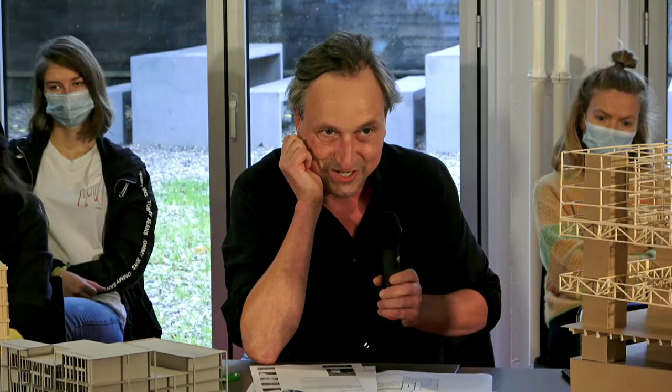Last but not least, I would like to mention that Grafton won in 2020 the Pritzker Prize for architecture. So, I think now we can start with our first speaker.

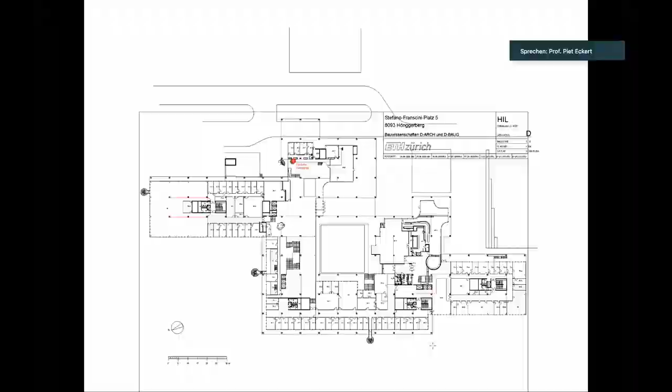And later in Columbia, I experienced the absolute opposite. The idea of the campus of Columbia University was part of the city, basically a city block. It had the intensity of Manhattan, and at the same time only consisted of

character buildings, so to speak, identities, so to speak, whether it was a classic or even a postmodern expression of it.

But the experience from the technical university we had in Switzerland was completely different from this model. One of the epicenters was this building, the Avery, the architectural library, which is the epicenter of architectural education at Columbia University.

And the architectural expression was absolutely the opposite, as I said. It was signified in a way as institutional architecture, and the role of this building was fundamentally different from the technical universities in Europe.

The students were not present here, but were working spread all over Manhattan or even greater, and you went there to meet each other. So it was a kind of melting pot or meeting place. It was never related to the work itself, but to debate, research, meeting or lectures. I find that quite impressive as a model, and also in terms of the plan, the specificity was fundamentally different as an experience.

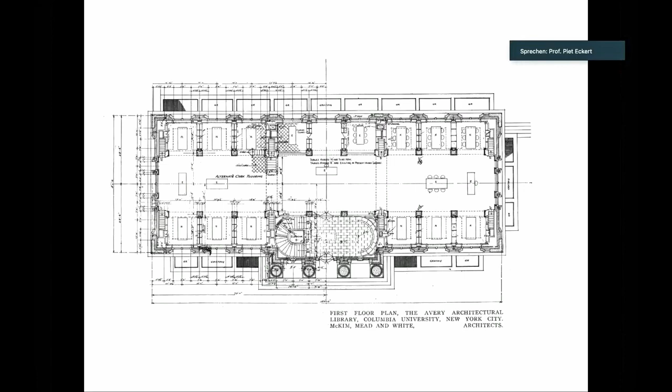Here we are facing an almost monumental architecture, one of the very few classicist buildings in the Ticino. It's an architecture that basically had only two components in its typological expression, and you see this really well in the section: a terrific aisle that is very high and very continuous.

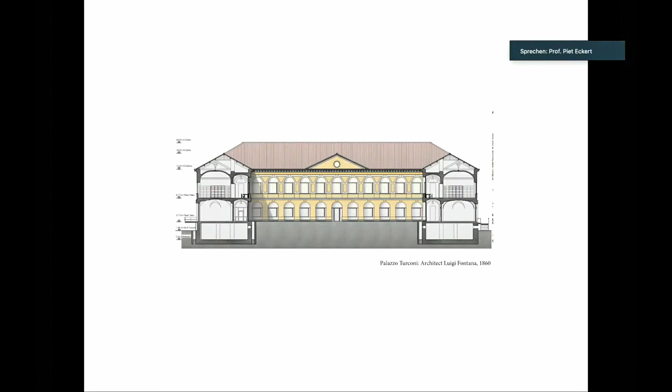So I found this maybe a kind of key conclusion, if we talk about strong typologies: we are not only talking about spaces, but also strategies that these typologies generate, in terms of the question of what is important as a space and what maybe is of less importance.

And in 2007, we all knew something happened profoundly. The introduction of the iPhone by Steve Jobs caused a fundamental revolution in the media age. Everything became different in terms of communication and accessing knowledge, and what used to be, in a way, a very collective experience of information became related to one single content as an experience.

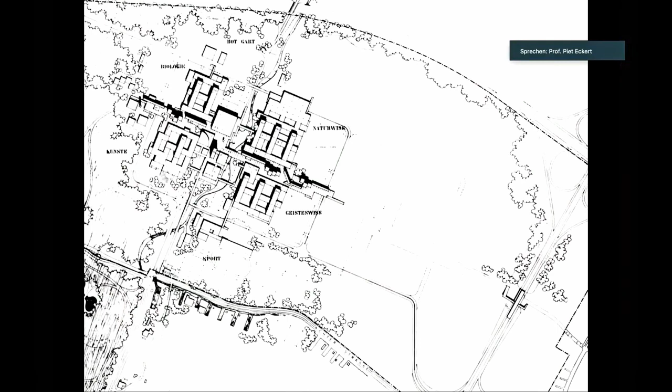As Oliver mentioned, we are currently planning a new university building in Bremen, and what you see is the master plan from Gottfried Böhm, a very important architect in Germany. It was a master plan done in the 60s under the premises of Freie Universität. The founding in Germany of Freie Universität was linked to a broadening idea of access for society.

And it was based on a very strong modularity. It's almost a universal idea of architecture, that through the module you would expand the notion of possibility, adaptability, and availability of space. It goes further that this idea of universal was expressed by the early buildings through a kind of stringent module that has been executed over the entire area.

It was a profoundly anti-central premise for the education. So every building had its own faculty, and every faculty basically worked with the same modular condition of grid. And this is the context in which we have been asked to design a new building.

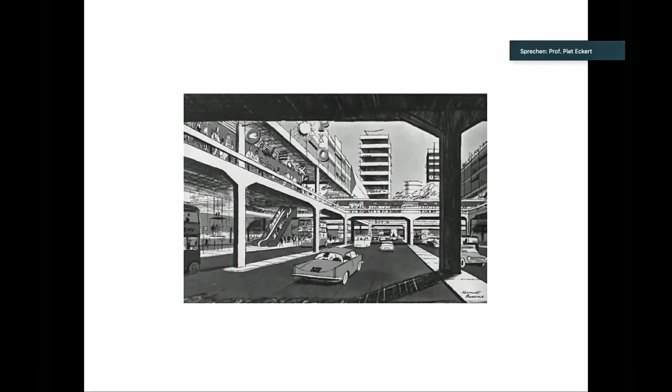And you see, even at the early expressions, the layering, the idea of infrastructure that was related, which almost goes back to certain referential projects of a heroic modern age, like Rush City and others. And this was the current, or the found condition, that we have been working in.

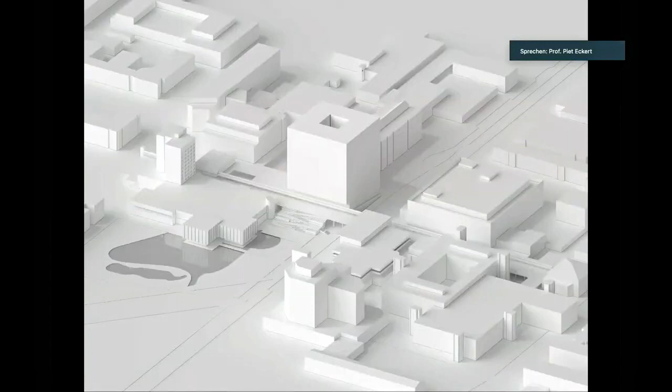So this was the project on the urban level, an implementation. And what they asked in their brief was an explicit central milestone, like an iconic building, so to speak, that would create a center in the centerless master plan.

So it just shows you how quickly an ideological, political ambition has changed its direction and focus. And the idea that the master plan today, with a fairly generic, gridded, modular architecture, had to be encountered by a specific building for only meeting. In other words, you could say it was almost an implementation of the idea I've mentioned into a kind of context of universal gridded equality.

So our idea basically was to stack this program and to create really a 60-meter high-rise building that would allow maximum freedom in the sense of this programmatic idea of meeting, gathering, producing basically a spatial arrangement to organize centralized meeting functions on the entire area. This was the perspective from the front.

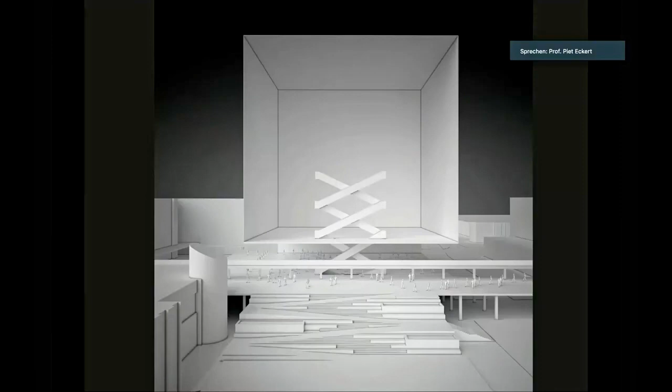So the building basically only has four typologically different levels, although it's almost 60 meters. And the architecture is really linking to this network of high lanes, this bridged level over the effective ground, where the students and where the network, so to speak, is taking place here in Bremen.

And the concept was basically to take an indispensable expression of architecture that is very much linked to the infrastructure, to the core design, so to speak, and create an extremely robust expression of architecture. So almost a kind of analogy to the Centre Pompidou, where a maximum of freedom was exposed to the core, space frame, and infrastructural elements that would in any case have to retain or remain as a fixed architectural expression.

So, of course, with the structural engineer, we elaborated this scheme, and let's say the architectural attention is really playing into these indispensabilities of conditions that the project delivers. From the volumetric development to the structural development, through the organization of security, into access, the architecture developed these components that would retain an extremely high degree of freedom for the rest of the spaces.

And this was an interesting scheme for us, because this is how you add the rescue route if you make a high-rise for a few thousand students that go into auditoriums, meeting rooms, seminar centers, and so on. How do you actually get these people out?

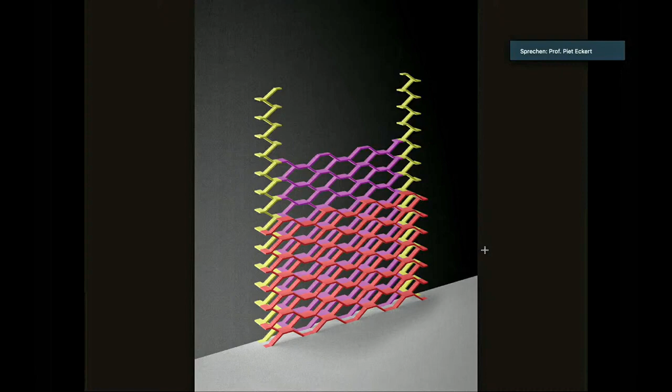This was an add-up of the width of exit routes that were a consequence of the stacking. We translated this into an architectural agenda of exits, staircases, and routing, that became one of the premises of the architecture. The core design, the space frame design, and the backbone became the basic typological expression of this architecture, telling a transparency or simple stacking from the front, reacting with the building. So the exit strategy became the backside of these arrangements of free spaces.

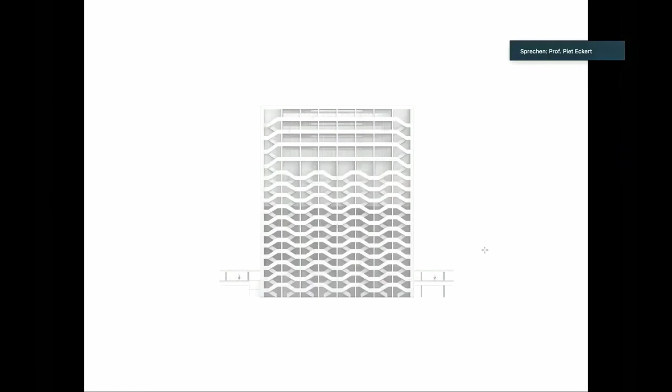You see in section that the basic expressions were encountered in the planning, where all the developments of the in-builds are furniture. It's like a stair, like a chair or a table, but even an auditorium is a big furniture. Everything is developed from the idea of furnishing these premises of space that become, in its expression, a priority, a base expression.

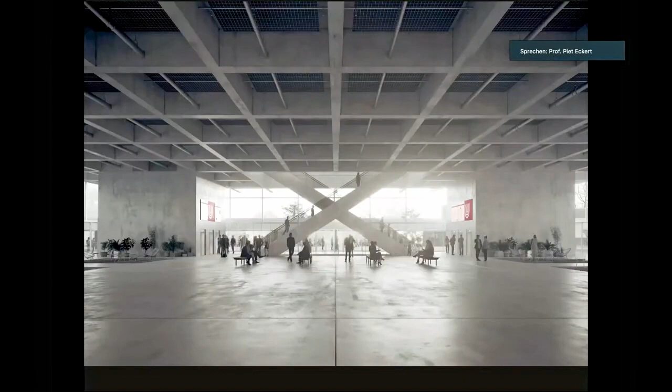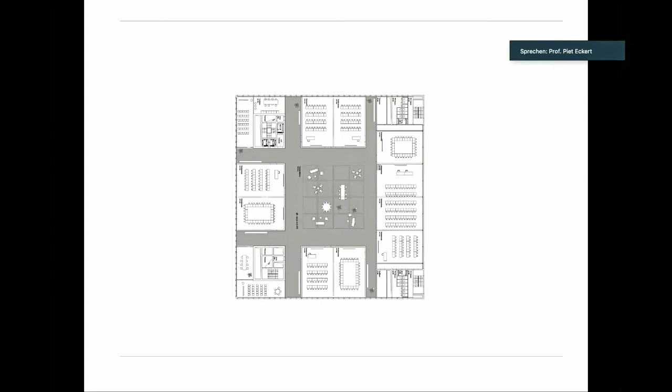You see the auditoriums that actually work as an inbuilt, as a furniture. The seminar level is the same thing, and the research level as well. So it's a very basic stacking and a very basic expression of architecture, allowing the expression of it.

Now, the second question, which got realized, I want to conclude this input, was near Zurich. It's also related to a meta context of education. In Switzerland, going to college was always organized by a public school. I'm a kid of a public school.

What happened is that the canton of Zurich, the department responsible for the educational program of college, has not extended the capacity over the last 30 years, due to political reasons and budgeting. But the space of metropolitan Zurich has almost doubled. So what's the consequence? The development of college, or sending your kids into college, becomes a budget question—eminently politically questionable, so very delicate.

This project was designed under the premise of developing a secondary education that replaces straight access into college, by a wealthy community that could afford to create an alternative scenario in order to prepare their pupils for secondary access into college. It sounds complicated, but it's just a political decision that has a huge impact on availability of education. The building was on a very beautiful site, and it was delicate to maintain it, but that's not really the topic today.

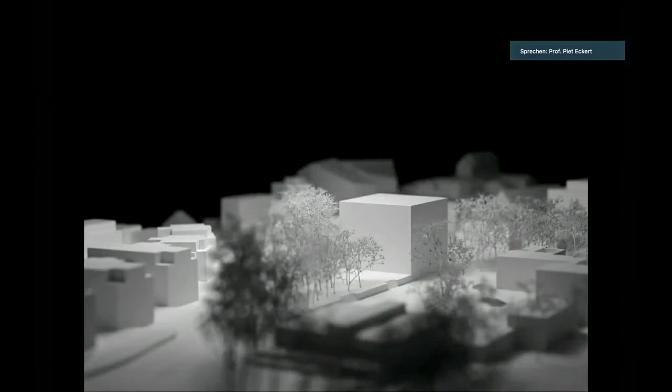I'm trying to conclude here that this project we designed had new premises, one of which was that the seminar spaces or classrooms were about to completely dissolve. It was an incredible provocation to us, because a classroom in Switzerland was always a module, a given idea of how to really teach and create a familiar place for pupils. Here was a complete provocation, where classrooms started at 18 square meters and would reach maybe even atelier sizes of 150 square meters—a fundamentally different behavior.

What we did at the time is reverse the strategy—normally the classroom is the stability concept in space and the liquidity of the space is the circulation. We reversed that and introduced a very stiff, robust idea of circulation in order to create a softness in space for the classrooms. The structure of the concept, the structure of the building, is designed by this circulation, which you see.

It's a 3D development, a structural concept created by a concept of rotation. Every core, every aisle, is rotated on every level by 90 degrees, creating an inner structural core that would sustain large spans of the periphery of the building. You see this structural model without slabs, so to speak. Every time, the space rotates by 90 degrees.

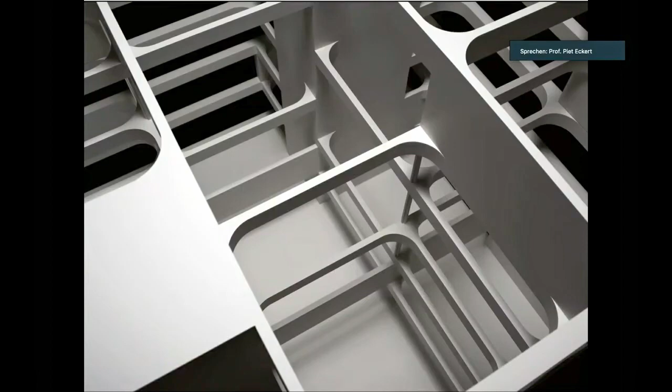The consequence of it is a building that spans over 20 meters, and the aisle sustains the potential sagging of the slab. As a rotation or stacking idea, this makes the sense of organization of space.

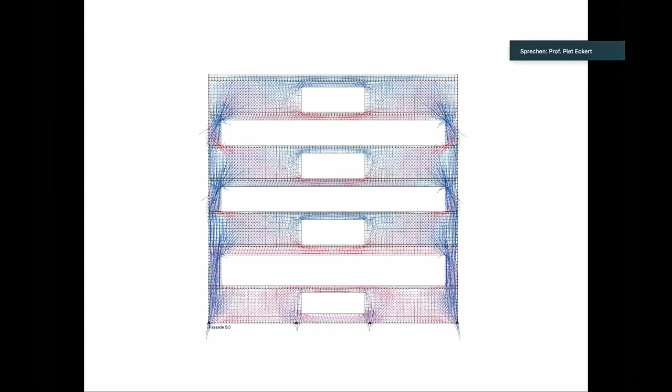And this was the freeness of, let's say, the areas that were supposed to be the classrooms. And the consequence is that any kind of scenario would be able to create, in terms of sizes, dissolutions. And I found that for me, this was a kind of an eye-opener.

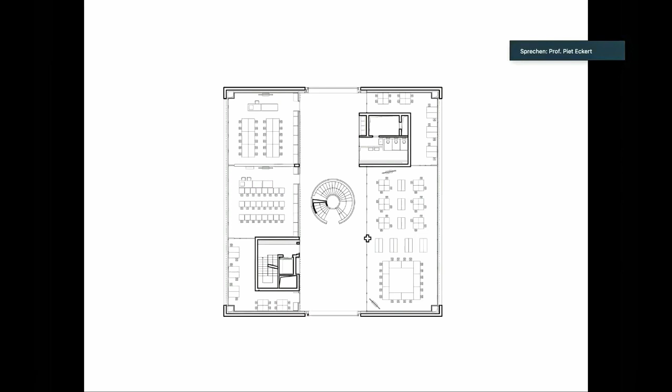Regarding the question: what is really a fixed parameter in architecture to sustain education, and what becomes really liquid? As a sort of conclusion, at Palazzo Torconi, this strong expression of circulation makes the liquid usage of the aisle and the halls in a referential use. You see how this aisle rotates 90 degrees, and it produces this base where almost every bay you can close or open, creating a dissolution of what used to be the classroom.

And you see that this is very much related to a period, a temporality at one point, but also to a meta context that creates the stimulus and the constraint where architecture can interfere and solve it, basically through a programmatic or typological reaction that then makes it a formal expression of architecture. This is the way I would like to conclude this input.

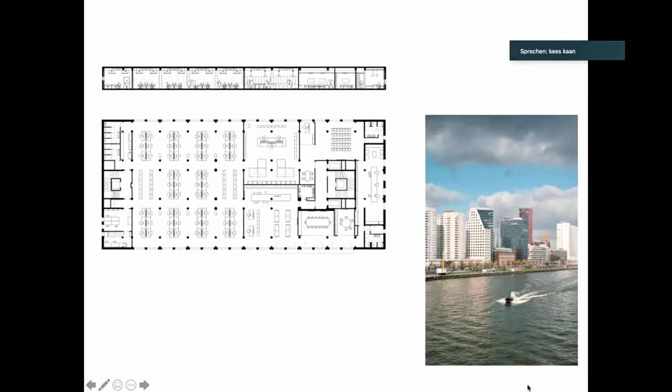That's something you cannot program from the beginning, because over time you use it in different ways. You use a space you thought would be a mini auditorium later for secret competitions, or you use a meeting room for something else, or a library for meetings. It's not about program, it's about quality of space and what we can do with it.

But we like to have spaces that are continuous on one hand and connected very fluidly, like you also said in your presentation, but at the same time specific, with character and identity.

In existing buildings, this is very often easier to achieve, because you sometimes find qualities already there that give you that. In new projects it's sometimes more difficult, especially if the financial issue is at stake. One of our first learning landscapes was the one in Rotterdam for the Erasmus University, which I call the excavation of a learning landscape, because when we started, we didn't intend this at all.

This was the beginning of 2000, just after the millennium change. We weren't triggered at all to doing this kind of space initially. It was simply because we found something that we thought was an enormous opportunity to create this learning landscape. It's the Erasmus Education Center.

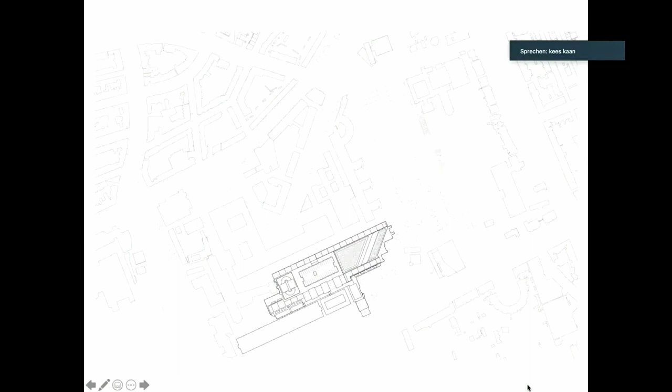We were in the slipstream of this mega project. And of course there was a tender, a competition. We looked at the project and found that in this huge complex, the exact position where they wanted this education center situated was - I hope you see my cursor - in this area.

This drawing on screen is from the original project when it was built in the 1960s. What you can see is basically a big plateau, and on top of that different pavilions, all with a very generic structure, typically 60s, but with a sort of structural overcapacity. The idea was that people using this facility would walk from one pavilion to the other over the platform outside, and enter again inside.

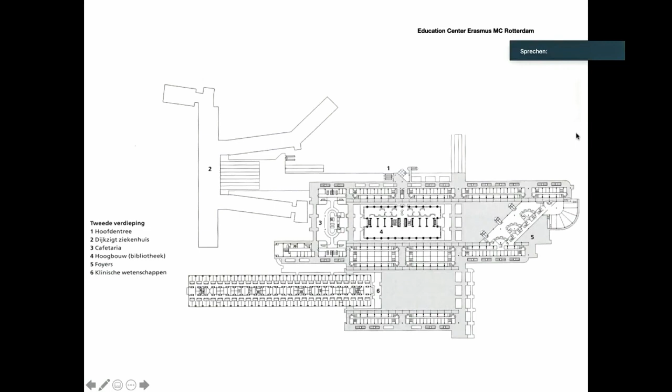Well, 3 months after the opening of this facility, here you see it - the floors. So those were all these entrances.

And on top of it, the floors were connected. So on the third level, the second floor of this whole thing, these floors were connected. What happened in reality, after 3 months the building was in use, they closed all the doors here that led to the outside, and they started communicating over the third floor, over this second floor.

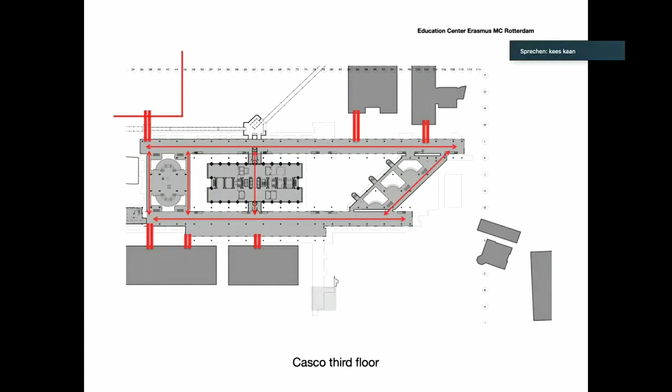And what also happened over time, the connection with other buildings that were built around it were made on that floor. So the building was actually from its beginning used in a completely different way than it was conceived by the architects. People were using the corridors of normal office spaces as the main circulation space in the project.

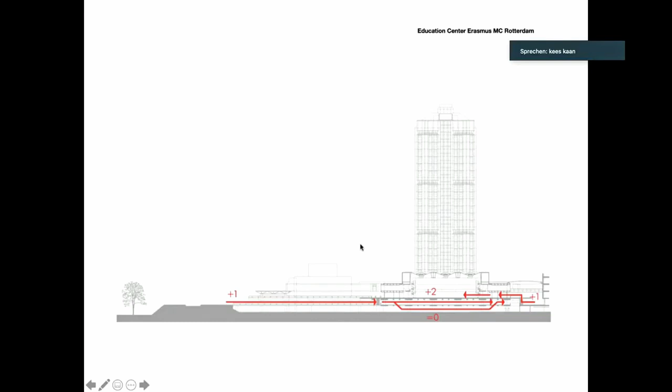And here in section of the complex, you see what this meant. So the circulation space was here on this level, where the main circulation space was supposed to be on the level +2. What we did when our client asked us to think about this project, and they asked also some other architects, we proposed to cover the inner courtyard of the building, and by doing that, restore the original intention of the complex.

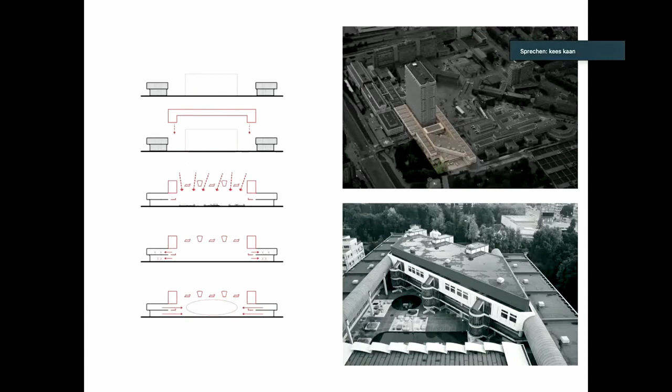So we proposed this to the client, and they liked the idea very much. This was one of the sketches. They said, okay, let's do it, but that means we need to rewrite our entire program, because they hadn't anticipated this move or this complete change in the project. So they said, okay, you get the project, but you have to study now with us first on what we do with this big space.

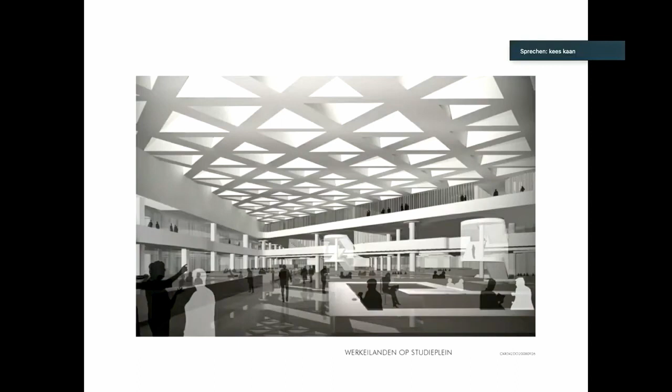How can we use it? What do we need there? And how can it replace classrooms and other spaces that we originally had programmed in our other program? So we worked more than a year on rewriting the program, and then we got started on the project.

And what we call 'bijvangst' - if you fish, you also catch fish that you don't intend to catch - was that by taking out the corridors and the wings here and here, because the circulation space was moved around the big space, we automatically were able to create larger classrooms in the 60s wings that were originally intended for smaller spaces. So it was sort of a win-win situation in that sense.

And the project was a surprise. It was actually a sort of act of serendipity, you could say, that we found something that we, or the client certainly not, were intentionally not from the beginning looking for. But we found it and we developed it further, of course.

Then architecturally, the decision was made to merge the existing with the new, so not to make a contradiction or a contrast between what was already there and what was new - what was there from the 60s and what was new in the beginning of this century - but simply merge it and blur the difference. And to make the roof not like a lightweight greenhouse roof, but to really give it mass, give it weight, so that it creates a room under it and not a covered open space.

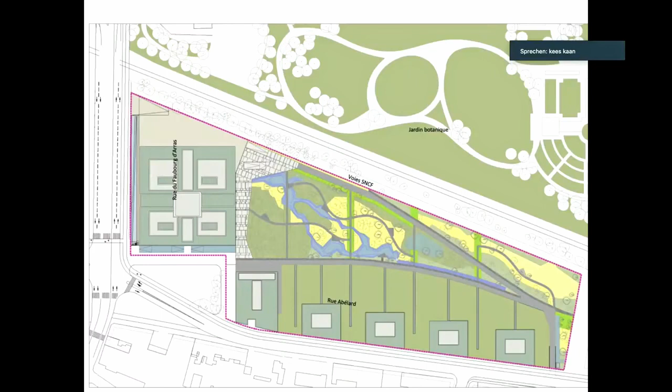We used the territorial stratification at that point, so bridges that cross the motorway on a level higher than the ground floor, to create a second ground floor level, and develop the two faces of the building: its double character as an educational institute on one hand and a representational facility on the other, with two different levels in the building.

That was the vertical stratification of the project. For the horizontal one, we subdivided the entire building into four quarters, and each quarter also contains, on each level, a certain part of the program. The ground floor is partly logistics and partly the entrance and facilities of the Chambre de Commerce. The top floor holds office spaces for both the Chambre de Commerce and the school. The middle part is mainly education spaces on one hand and representational spaces for the Chambre de Commerce on the other.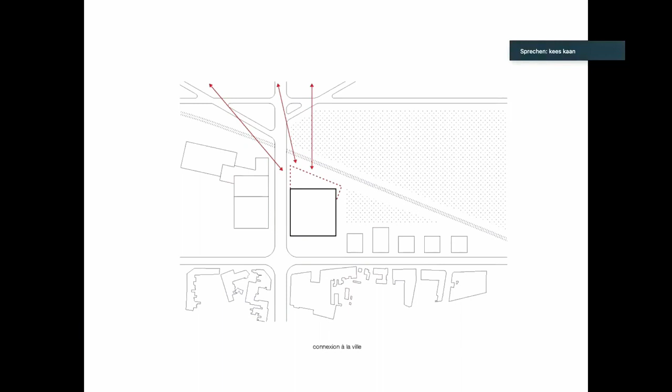So this way, the building, which is of course big, gets subdivided into three layers and four quarters, articulated inside with patios and cores, staircases and elevators, in such a way that they facilitate this subdivision for this huge plateau of 80 by 80 meters to function and absorb the program. And as Piet already said, don't follow the program too closely because it changes while you are designing, and certainly afterwards—that happened also in this building.

This is the level of the entrance of the educational program, the school, and on the other side you find the entrance of the Chambre de Commerce on the ground floor. So this is the subdivision into administrative and educational in plan, and also the repartition of the program—vocational spaces, a huge professional kitchen with many desks for future French chefs, but also on the other side of the building, the more representational conference and meeting spaces of the Chambre de Commerce.

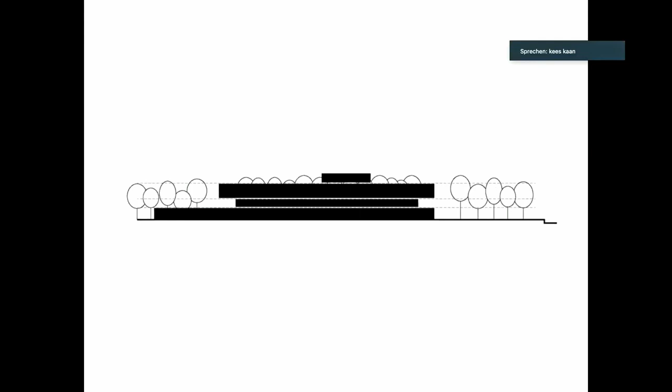In this section, it works like this: you have this stratification of three floors, a central space, and an auditorium that connects everything. And that works like this in the overall section.

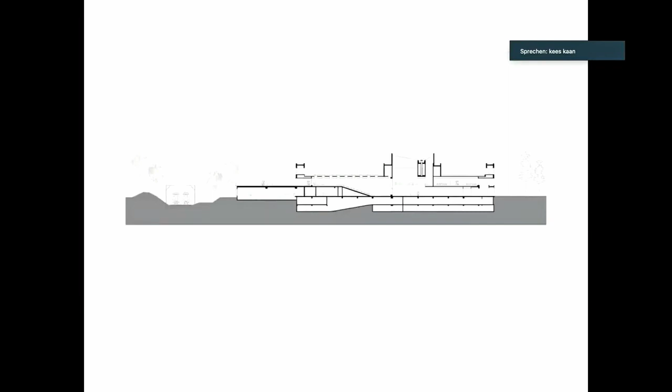This project wasn't so much dominated by ideas about the learning landscape, in the sense of how students of the hotel school or cooking school meet each other, but rather how do we deal with different uses in one complex that have completely different agendas but have to use the same space, co-live and co-use this large complex, and how can we create synergies between them and give them spaces that otherwise would not exist if the programs had not been combined in this way—like this big central space in the heart of the building.

That gives you the view into the auditorium, and on top of the auditorium the foyer at the back, which is at the level of the entrance of the educational center. So the different parts of the original program together generated extra spaces that were not foreseen in the original plan.

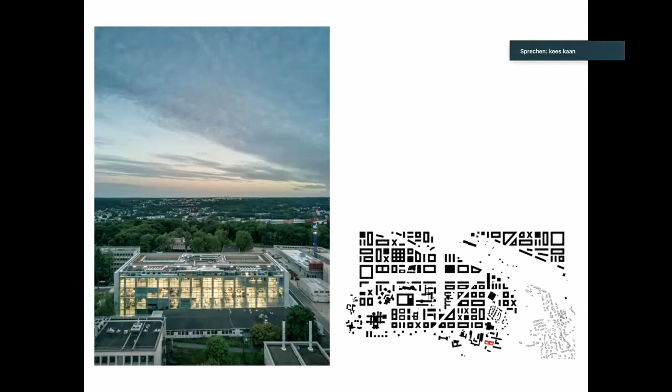Our project is situated on the edge of the valley adjacent to the huge campus area. In this aerial photo on the left, you look from the north facade back to the valley of Orsay, where you find the old village and the old university—so you're standing with your back to the new development of the Saclay campus. Our project was situated amongst a few buildings of the original 1960s university campus, and had to be squeezed in between these existing buildings.

In the competition we were thinking: how is our building going to be part of this new campus? How do we set it into that existing context of the 60s, and how do we deal with the orientation and the program? Because it's a research building, and research buildings tend to be very introverted. Laboratories tend to be closed, especially this kind of laboratory where they do molecular research with laser beams and light, tending toward inward-oriented buildings.

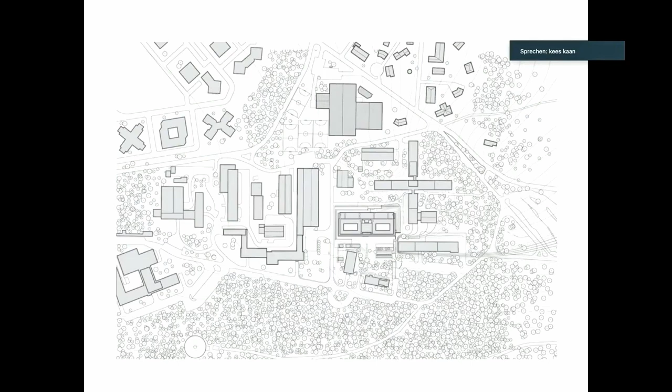So how can this building participate in the new campus, in the new idea of learning landscape? Basically our conclusion was that we had to build it as compact as possible, to leave as much space as possible between existing buildings and for existing trees. That was a relatively simple conclusion we quickly reached after studying the massing and volumetry of the building.

Then the relation between the research program, the focus program, and the communication program led us to the conclusion that we had to turn the building inside out. So instead of doing the building with corridors in the middle of the wings, we put all the corridors, all the communication spaces, on the facade—that was actually the main intervention.

So: corridors on the facade, spaces for reports and individual research focused around patios, and all the laboratories stacked on the north wing with different floor heights and an orientation to the north.

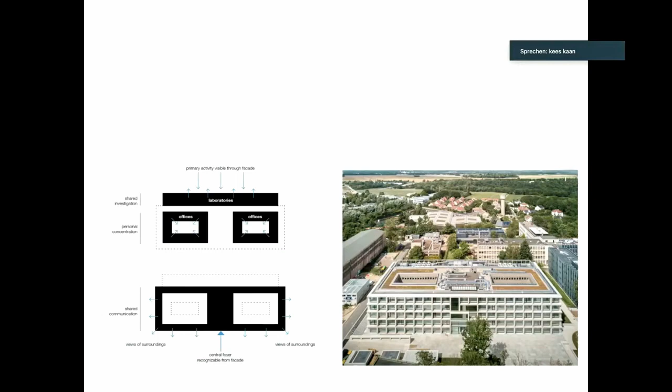And a small void in the middle of the building above the entrance, allowing the actual communication that people do when they walk from their laboratory to their office and back, allowing them to meet other people in spaces that are not hidden inside the building, but that are actually part of the campus. Also hoping to encourage the use of these communication spaces, these corridors, to hang around, to sit, and to not hide yourself too much inside the building, but really go to another place, meet somebody, have a coffee, engage with others. It's something we learned recently from the pandemic that is very important.

One of the main problems we had in Delft, in our university but also in our office, was not the efficiency of online meetings and gatherings, which worked very well, but simply the occasional serendipity of meeting somebody incidentally, or coinciding events that bring you onto another level of thinking, which is completely lacking in a world where we all isolate ourselves in our own house or room. This is exactly what we try to encourage in our learning landscapes. Our types of buildings are all aimed at developing these kinds of possibilities, although maybe not always the means are there to do it.

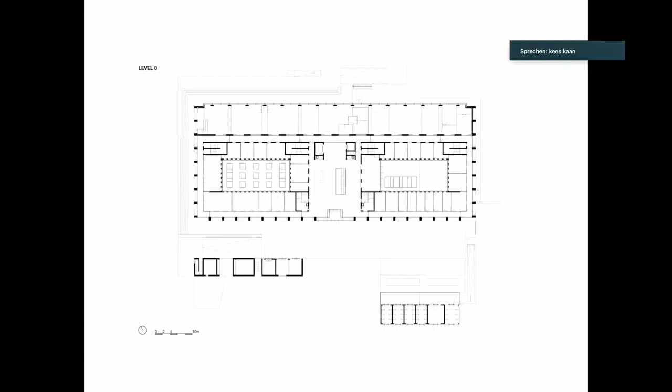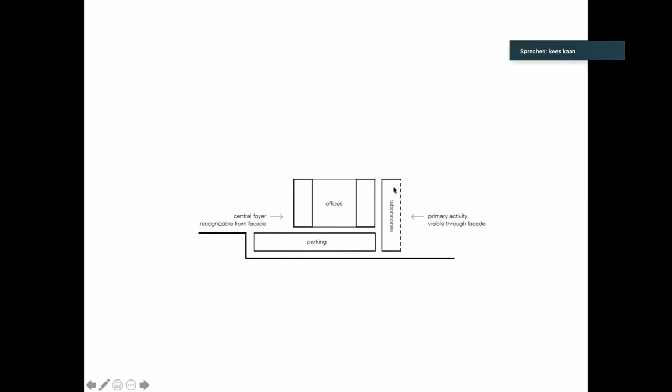In the case of ISMO, this project, I think it's a very compact and efficient building with a quite good Brutto-Netto ratio. According to European standards and budgets for education buildings, it was not an exceptionally expensive building. But inverting it completely still makes it a building that encourages this meeting. So coming up from the staircase in the parking garage into the central space, where all the corridors come together, and where you find small libraries and small places where you can sit, meet, and talk. An auditorium suspended in the heart, under the ceiling of this central void, and then the section with the laboratories on the north side that show the core activity of this research building, doing research on molecular structure of materials, showcasing that towards the campus.

So this is the project. There are some jokes in the Netherlands, when we talked about restoring monuments in the city center of Amsterdam, that you were never allowed to see the lady in red walking from one parcel to the other, because that was completely contradictory to the structure of the city. In this case, we want to see the lady in yellow walking the corridors of the building, walking behind the facade but on the perimeter of the building and also in the campus.

For a couple of years, I was sort of supervisor of developments in our university in Delft, following projects, selecting architects, helping the client decide on quality issues regarding the urban development of the campus and the development of the architectural projects.

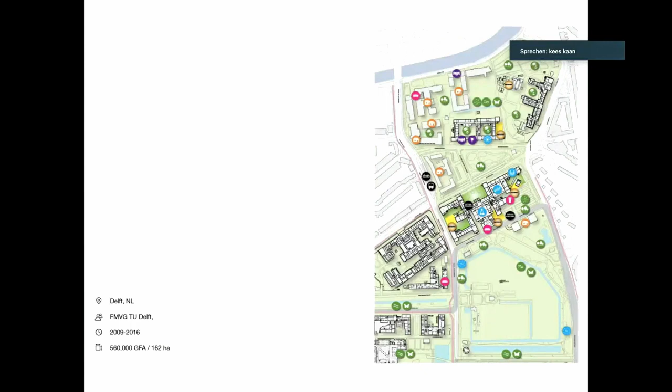When we got the temporary building we are still in now, we continued that way of working, and it also had an effect on our education and how we organize it. In my studios I emphasize teamwork, so we always work in teams, matching individual work of students with collaborative work on projects. So there are always big models for big scale projects done by a group of nine students, with their individual projects also part of it. This collaboration, this notion, was also the notion of the living campus in TU Delft, where the university discovered that they couldn't control the development of the campus anymore, because any time in history when they thought they had a stable situation, something unexpected happened.

A faculty disappeared completely because there was no need for it anymore, or it shrank completely. A faculty all of a sudden needed completely new research facilities that cost millions of euros for nano research or any other high-tech research that was not possible to build or facilitate on campus, that had to be built in an area with no vibrations or other physical conditions, or a building burned down and suddenly unbalanced the campus.

So we investigated the notion of the living campus, assuming that permanent change is what a campus or university is about. Simply accepting that, and also understanding that students more and more might not stay all day in one faculty building, but use the entire campus or parts of it, maybe a certain cluster. And they're not only using classrooms and college rooms, but they also need spaces where they can work together or alone.

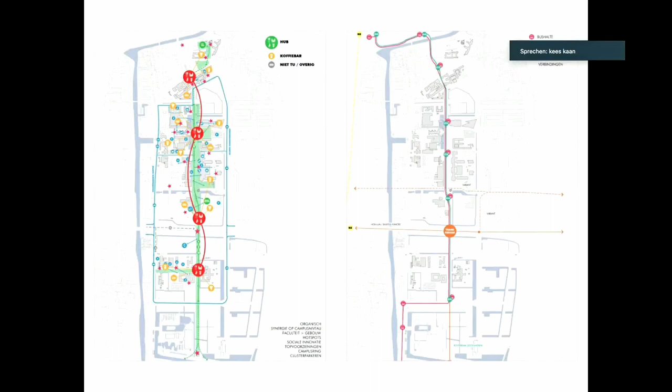TU Delft was trying to make an inventory of this, map it, use more data collection to really monitor the use of the campus and how buildings are used, and it's still in the middle of that. Also because there's a need to figure out what to keep, what to change, and what to demolish. But one thing it knows, and discovered, and other universities discover too, is that...

there is a new kind of campus, there is a new kind of faculty, but also there is a new kind of building need. For instance, the education building, which is not dedicated to one sector of knowledge, that is a faculty, but is dedicated to multiple sectors of knowledge, and is seen more as a general facility, almost like a library or a representational building, where students can go to work, but also where they can follow classes or do exams.

And we developed, or designed, one of those facilities at the University of Tilburg. But in Delft, we're also building then. UN Studio is building an education building there, which is still from the time when I was supervising the development of the campus and talking with the board of the university on where to build these facilities.

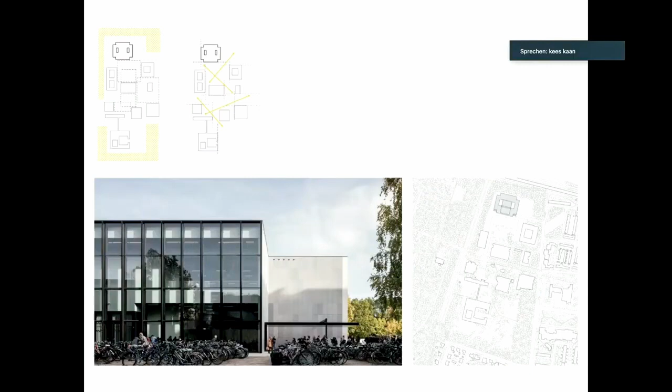The program is a sort of starting point. It's a critical starting point that generates the urgency, or illustrates it, and allows a project to start, but then the project has to liberate itself from that program and also be able to facilitate other kinds of use, be generous and be thought carefully towards the future.

In this case, this education building, we made it a very simple structure. We said, okay, if there are huge rooms that don't require daylight, exam rooms and auditoria, not necessarily direct daylight, they could be situated in the heart of the building. They are column free, they have big spans, they can be huge spaces. On the perimeter of the building, there could be classrooms of different size, that need to be generous, that need abundant daylight, a view to the campus, maybe be so transparent that light penetrates to the core of the building, emphasized also by two patios that are there.

We simply cut away the corners because of the more difficult corner situation of these classroom spaces, and that generated the floor plan you see on the right bottom. So what you see is a perimeter with classrooms of different sizes, 2 patios, a big central self-study area flanked by these 2 patios, and a big auditorium sunken in the ground, allowing transparency from the campus looking through this auditorium to the central space in the heart.

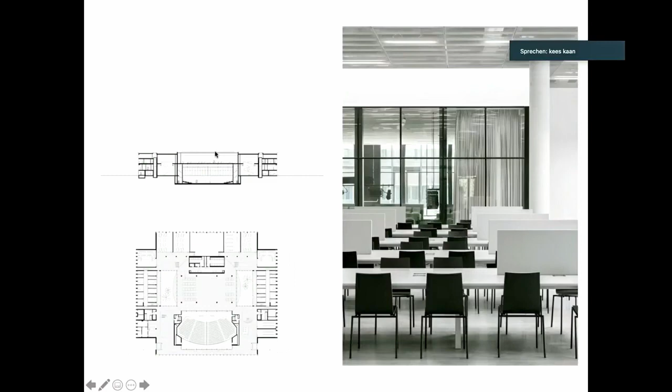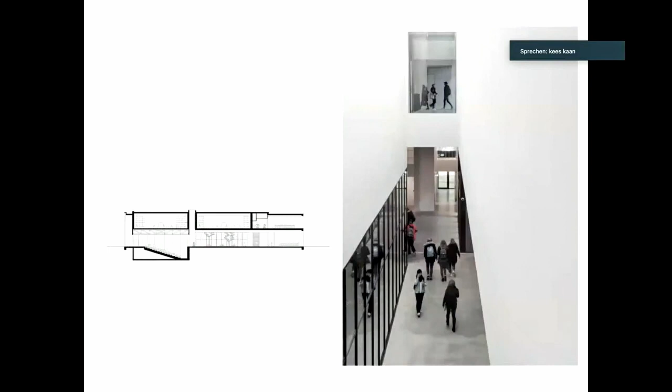On top of it, you find these exam rooms in the heart of the building. Something very important, also explained in the lecture by Piet, is that our education buildings are not only consisting of what you call a generic part, where we subdivide classrooms and seminar rooms and maybe the large spaces where we gather, but in university buildings, flow space is very important.

In this education building, every hour or two, there's a bell ringing, because the whole university functions on a certain rhythm of this bell, and students move from one space to another. Either an exam finishes or a classroom finishes, and then you hear an increasing noise in the building, like a herd of elephants arriving. It takes a couple of minutes, and then it gradually becomes quiet again. In that period of 5 to 10 minutes, students have taken other places in the room, or they left the building, or new students come in.

So in this kind of buildings, the flow space, the staircases, the voids, the communication spaces in the building are a very important entity of the entire system, and our emphasis when we design these projects should really be on them. That's why in this project we have a lot of transparency to the green of the campus, also from these staircases and communication spaces, not just for the nicety, but also in terms of functionality—it's important to be able to orientate, to quickly move from one space to the other and find where you need to be. It increases the effectiveness of the buildings.

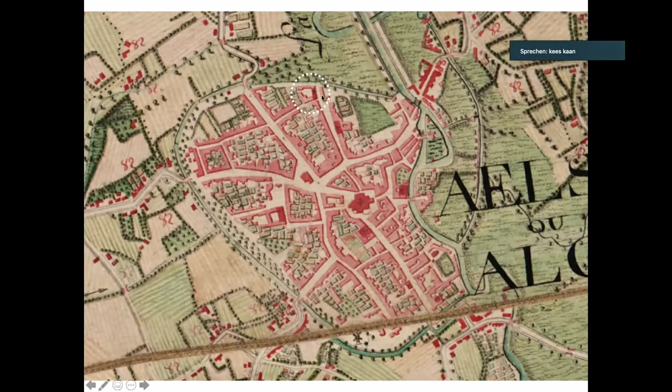It was a competition to develop, next to an existing building in the city center, this program. The circle gives you the site. It was originally on the perimeter of the medieval center of Aalst, but it gradually, as the city developed through the centuries, became a more central position. As you can see in this drawing, Aalst has this typical large-scale building block structure that many small cities in Belgium are characterized by—on one field you find different buildings that together create a perimeter, but it's not always very clear and precise, with a big variety of program and a large enclosed îlot in the center.

So was our site—it was a small perimeter building there. And we proposed something very counterintuitive when we did the project, and it took us a long time to figure out that we had to do that.

So we proposed not the perimeter building, but a very compact proposition for the project that would create these small public spaces around it that seem to be sort of leftovers, but are actually very nice, almost interior spaces that have the scale of the city center of Aalst. With a contemporary building, whose grain is of course quite big compared to older buildings, we were able to bring back the grain of the medieval city, the scale of it.

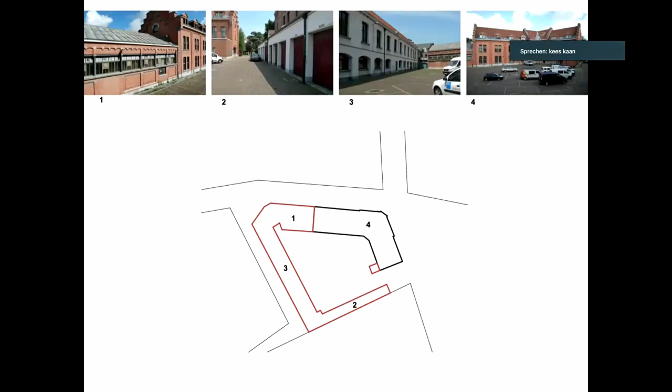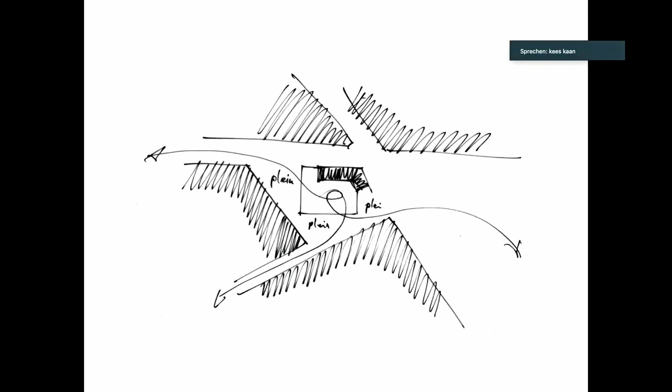So this is what was existing. Red is what we were supposed to demolish. Black is what had to stay. And we simply said, okay, we just add a rectangular building to create a very interesting and properly scaled public space around it, with each face of the building oriented towards it.

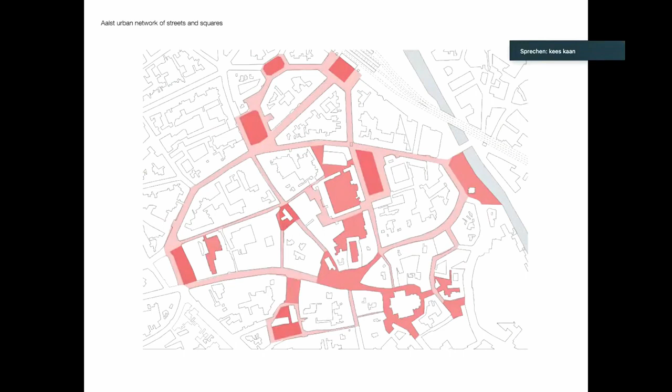And we frame these programs in big windows, so they interact in a very direct way with that collective space around it, connecting the city with the program in the building. It is a building that is very much about a building for the city, for the people that live there, for the community, and that was stressed in this project in a very simple, direct way.

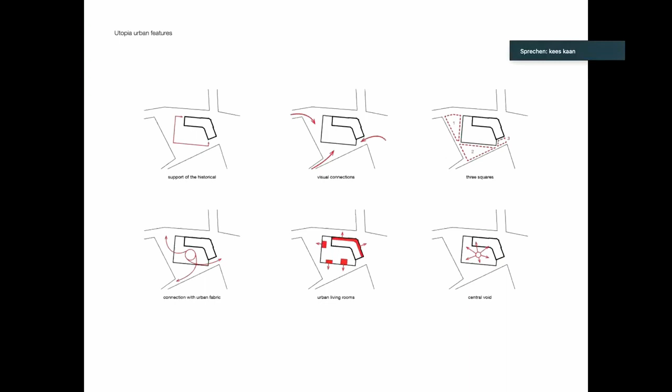So a new compact volume that facilitates the entire program, that sort of merges with the existing structure. We don't put it next to it, but we let it penetrate the existing structure in a very prominent way, creating maybe some difficult tension with it, but at the same time creating a very nice interior void. And in that void, of course, you find the library.

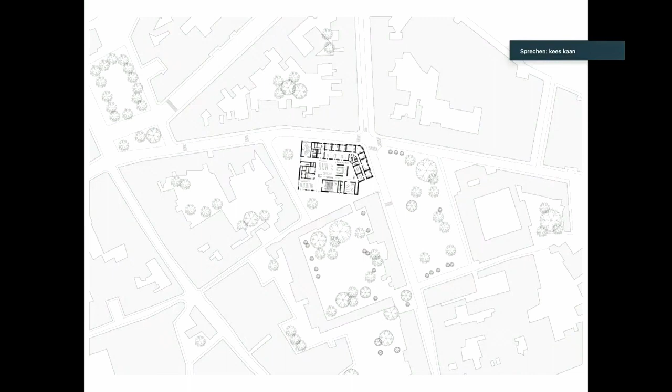It was very difficult to combine the silence of a library with music-making spaces, drums, piano, violins, etc. So we situated all the music rooms in the existing building, where we had to do anyway a sort of box-in-box structure, because to renovate the old we had to build new in it. So we might as well do that in a noise-isolating way. That delivered the distribution of program over the building.

So you have this entrance here on this little square with a cafe right next to it, an entrance to a small auditorium, the library. All the structure of the building here is hidden in the bookcases, so there is no visible structure. It's one big space with bookcases in it, and they camouflage the concrete slabs that carry the roof, and also the staircases and the floors in the middle.

And that's the result of the project. Here again, the drawings give you this idea. So everywhere you see bookshelves, you can imagine a load-bearing structure that carries the floors, the staircases, and the roof of this one-space building. The library is the core, and around it, the different other uses. And of course, the views towards the city.

Thank you very much.

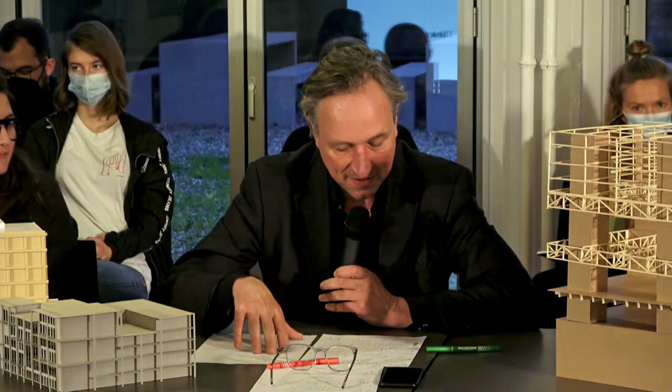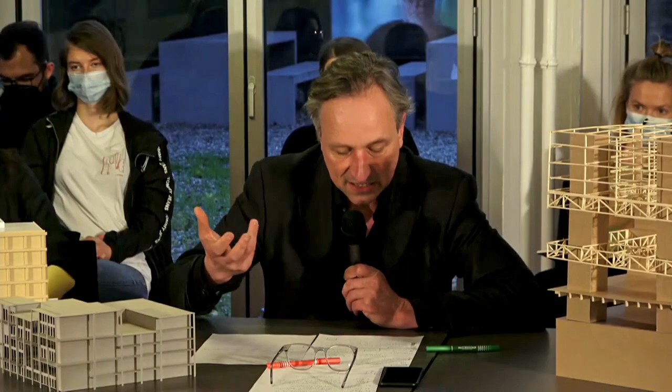Thank you very much, Kees, for the lecture, and I would like to start with the first question. Basically, you started the lecture with a sort of Los Angeles-like argument to say, okay, when you have an office, why should not everybody be on one level? And I think by doing so, you addressed on one hand the problem of stacking. That's always difficult to make an education building with a lot of floors.

But basically, you also said that horizontality is a way to offer more or better spaces for informal learning. What is, I would say, a new thing to give an answer to informal learning and also to get rid of, or to have an influence on, the program. I have a very precise question for Kees: do you think the architect should also be an advisor for the space program, or do you try to generate a situation where you become an advisor for the program, or for educational buildings? Because as I understood, in several projects you mentioned going for an open process, using the program as a starting point but at the same time freeing yourself from the program.

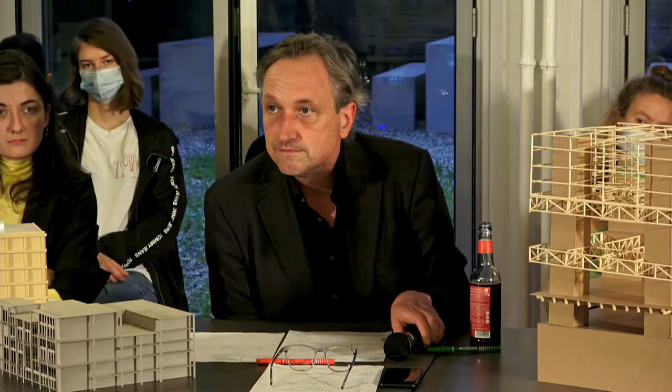Yes, I think architects are, of course, or should be engaged in the discussion and the debate on how our education buildings, or actually all our buildings, can be given a starting program, or how the question could be asked to the architects' community on how to design them. The word 'program' could be a bit confusing because we interpret it maybe in different ways.

I said in my presentation that I always tell my students, or try to explain them, that by nature we always design for the wrong program, because our clients need to agree that they are willing and prepared to invest money, or get investors to invest money to build something, because there is a certain need for something. And the proof that they need it is very often that they can say, we need so much program, we need this kind of square meters to use in such a way, and that costs so much money.

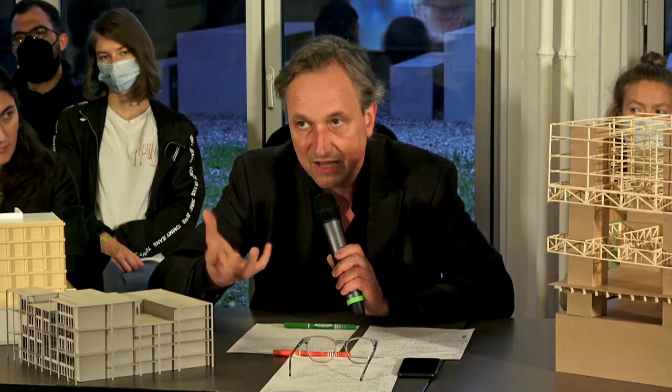You said in your lecture at a certain moment something like it had to be as compact as possible. And we also noticed that, I think at the moment, one very new quality of education buildings is that they are far more compact than the buildings we know from the past. So for sure there is this know-how from the 19th century building or modernist buildings, but what we noticed is that, for certain reasons that have to do with sustainability, with budget, but also with the aspect of informal learning and the fact that you have to bring people together in a building, the buildings themselves become fatter and fatter.

You get very big buildings, and you also mentioned it with the 80 by 80, the building you did in Lille. I think it was unthinkable in the 1950s or 1930s, but nowadays you see that more often, because I have the idea that that is a sort of direction that answers new demands within society. I don't know what's your opinion about that.

I agree totally. That's something when I talk about floor plates and square meters, I almost implicitly assume that everybody understands that doesn't mean buildings that are 12 meters thick and then 100 meters long, because then you have 1,200 square meters, but that really wouldn't work.

So bigger floor plates also imply fatter buildings. But that also implies more possibilities for structural invention and innovation, more possibilities for spatial relations, maybe higher floor to floor heights. So it also implies new possibilities in that sense. You have relatively less facade and more compactness in your building, and you have potentially more variation of spatial quality.

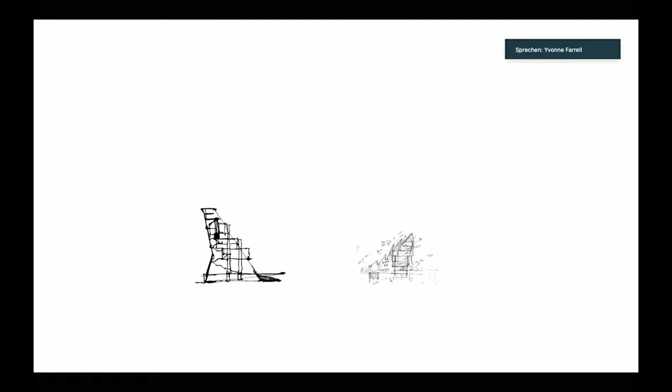So the issues of just looking at these two buildings in different places - on the left-hand side is Lima, and on the right-hand side is the building in Arkansas. One is a concrete structure in a city in South America, and the other is in North America. I'll begin, and these two are like practical studies for students to challenge you, to think and to ask questions, and to ask questions of us as practicing architects.

So this is a desert place, 12 degrees down from the equator. It should be really, really hot. It is on the ocean. It has these 40-meter high cliffs in from the Pacific, and because of a von Humboldt current coming up from Antarctica, instead of it being a really hot city, it's actually kept very cool by this current, and sometimes you have this amazing fog.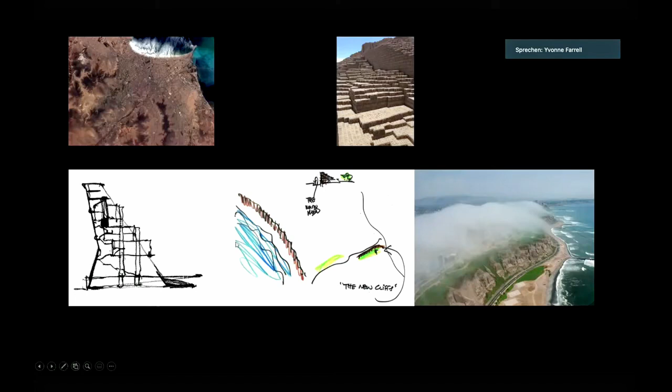What was amazing is that it allowed us to ask the question: what is a university on a very tight site, in a place where the climate is very different than if it was in Alaska or in colder places in the world? Could this challenge this kind of situation, that we could ask educational questions? What could a university be here? What could it be, an arena for learning? Could it be a man-made cliff? And how many of the spaces needed to be enclosed, and what could remain outside?

And for us, this wonderful drawing, this Naturgemälde, this beautiful drawing by von Humboldt, where he synthesizes all the various scientific data from around the world in his travels down to South America. He does this section, this beautiful drawing, showing that we are affected by place, we are affected by atmospheric pressure. He was an incredible person in terms of synthesis, and what we're really dealing with now is the earth as our client.

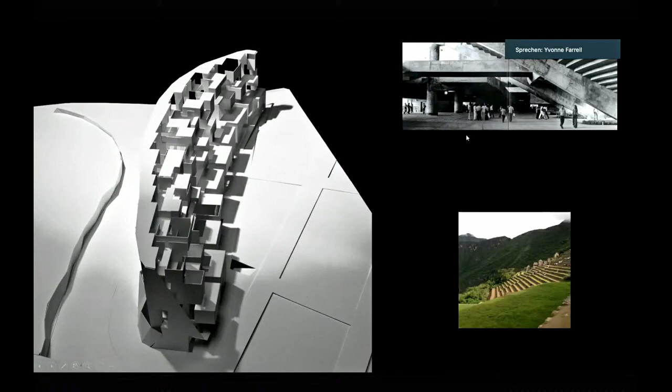So we began with a question, and this is really challenging, I suppose, to the students. We had a new university on a very tight site, a huge amount of accommodation. What could we invent that also had a sectional idea about overlap? We loved these fantastic projects in South America, like this stadium by Mendes da Rocha, and what we loved is the ability of the structure to allow social space to kind of liberate. So we used this cascading section with the roof of the bigger spaces down below to become something in terms of heritage.

So this is the section trying to translate an invented idea of a vertical university within the culture of a place where much could take place outside. So we wove this section with these bridges of circulation.

We made the big laboratories on view, so if you are a student of one of the other disciplines of engineering, you are able to visually see what is going on. So not only are you viewing into these laboratories, but you're also

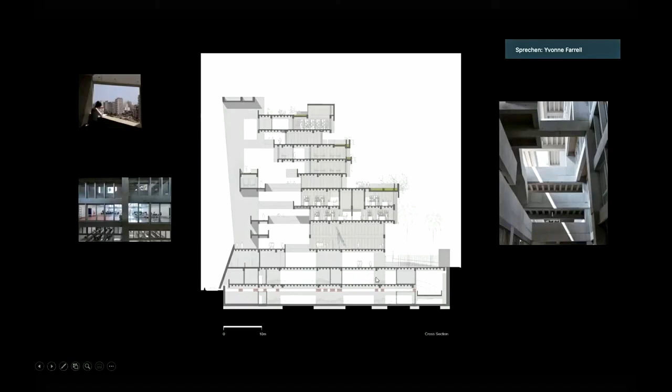For us, what was amazing was that this banana-shaped or boomerang-shaped site would have these structural circulation systems, every 20 meters, which allowed us to weave the requirements like an abacus between the various pieces of structure. And what has worked very well for us is that by not having it straight, you get this kind of medieval sense that you're moving through the forces of gravity in a slipped way.

So the image on the right-hand side shows the literal landscape coming in from the city, the movement and relationship out, the protection from the sun, and the visual, social and educational connection into the facades of the laboratories and teaching spaces.

So here we have this building sitting in its busy motorway, which is the new cliff edge of the building, protected from the sun.

In terms of reference, what's really interesting is when we were beginning this project, in terms of typologies, we were looking at Eduardo Souto de Moura's Braga municipal stadium in Portugal, which he built in 2003. And for us, it was asking the question: could a university be something else?

Could it be an arena for learning? Could an arena be something that we could use?

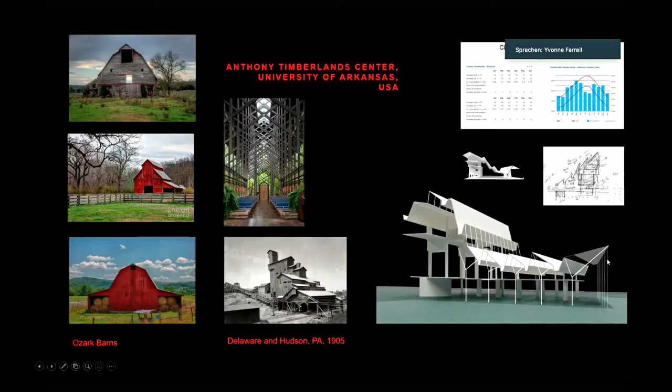Also in terms of us translating from the place, the heavy rain, and the heavy rain gutters, we invented these huge canoes to carry the water and take it away, but also so they would play a role in the architecture, in the making of the space.

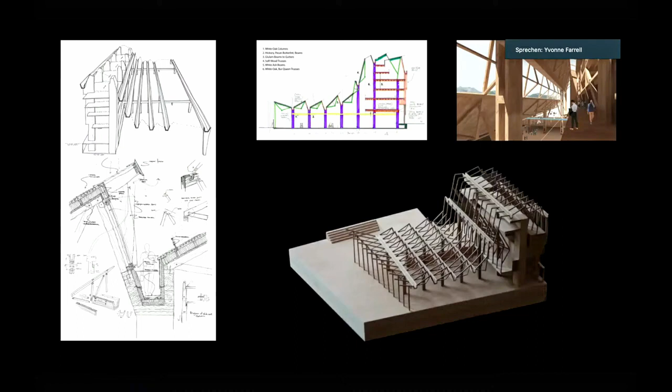So that's the stage we're at the moment. In terms of the section, we're really bringing this big space together rather than it being a type of shed - we're taking the shed as a reference, this no-nonsense kind of shed as a place where you have one space that links to the other.

In plan, you enter on the lower level to the big fabrication shop, and all the other rooms, if you like, wrap around it. These external views are as you enter, to the side and below.

This is really describing the connection between the fabrication shop up to the teaching spaces and the control of light. We describe the roof as a canopy of light and air, that the section is an educational connector, and that in the various weathers of Arkansas, this is the case.

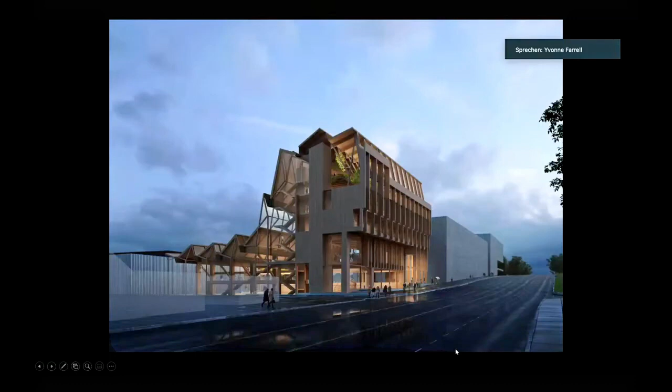So here the building stands on the main street, connecting part of the university with these vertical contours and expressing itself as a new interpretation of shed.

What I suppose is different to the projects Yvonne has just shown is that we're dealing with more familiar urban contexts in both of these cases, and we're dealing with the same program, you could say. We've done a number of schools of economics, and they're always different because the ethos of each university is different.

So just to say, one of the questions was, do informal factors influence the design? Probably in relation to the previous speakers, whom I enjoyed very much, I'd say we're probably more pragmatic.

I think in many ways it's interesting to see your work in the context of other people's work. We seem to gather moments and put them together and find the construct.

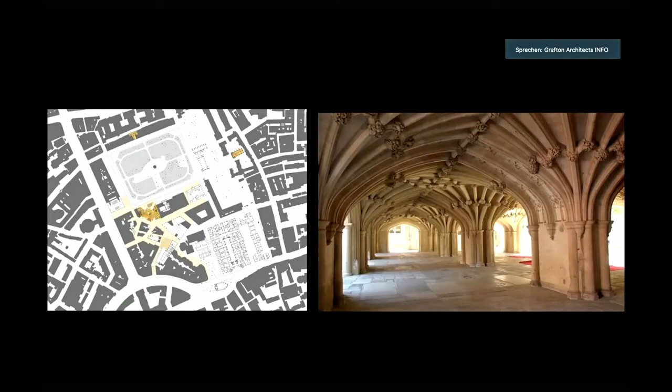So I'm going to talk about Toulouse, which again is a University of Economics. We think about this as a kind of sundial, because it's a very complex site - on the breach of a medieval wall, a very picturesque, beautiful location at the junction of the old city and the new city in Toulouse.

The project we did in Milan, referred to in our introduction, was very much about occupying the ground with the larger rooms and then offices up above, making a free space between. This was quite a different project, where Yvonne used the term choreography.

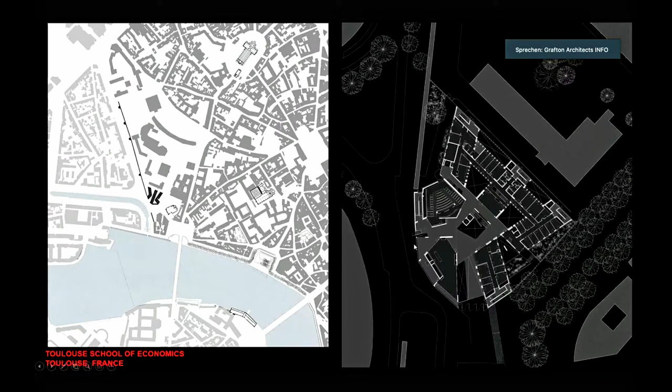This is a very beautiful city, and we lifted everything up into the air, so to speak, and the big rooms face the river, face the Garonne and the Midi Canal. And we made these openings between those big public rooms to make very large windows between the interior courtyard and the city.

Next image. I suppose this carries on from Yvonne's description of relation to place, the very particular relationship to your own place, and picking up on the qualities and characteristics of the city. We found Toulouse extraordinarily beautiful with these big red brick buttresses and tiny courtyards with windows to the sky.

Many of the buildings we visited, you were always moving outside or in a semi-external space. And they have these wonderful cloisters, buttresses, colonnades, and we made a collage of these elements. This is our competition drawing to do with how we could connect with outdoor spaces, both at ground and at roof level.

Next image. So in a way, it's like a spiraling cloister starting on the lower level and ending up on the roof. What we also found was that we started with a perimeter block in terms of how the building sits in the ground, and then it becomes free as you move right up to the top. It's like the building comes out of the ground like a butterfly, a kind of metamorphosis. So the DNA of the project keeps changing as you move from ground to sky.

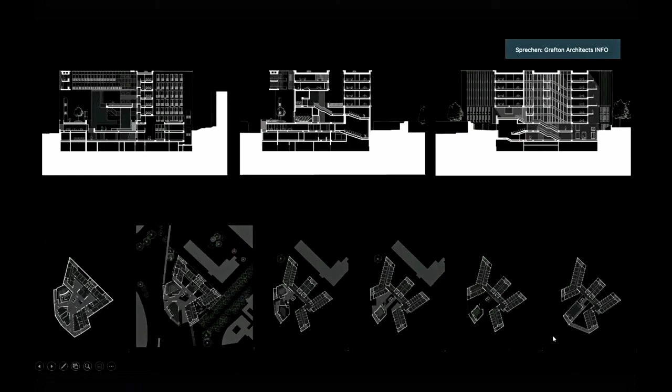Next image. Each of the surfaces is modulated in terms of environmental control, in terms of views, in terms of exterior and interior spaces.

There was a comment from Case that he didn't like columns. We probably love columns, but we have only one column in this building because all the facades are structural. Most of the circulation is, again, external, except when it becomes very private to the research offices. So you're moving in this tempered space between lecture rooms and office spaces.

Next image. When I talk about the spiraling of the cloister, it starts on the lower level. They have this lovely thing of making cocktail terraces between lecture rooms, which we capitalized on. Then the cloister disappears up into the fire stairs, which is also used as day-to-day stairs, all the fire escapes to the edges, which frees the middle. And then we made the Sky Cloister, which continues this promenade in section.

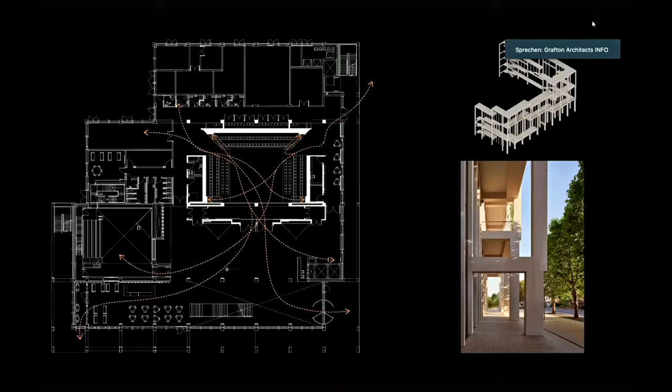Next image. So we were also, just thinking about typology, inspired by the Paustian furniture store in Copenhagen by Jørn Utzon, because the way the client was describing the program, they were talking about adaptability and overlap, and we loved this space, which really felt like a warehouse. We also loved the sketches of Utzon, which in this case relate the idea of walking in a woodland to the structure.

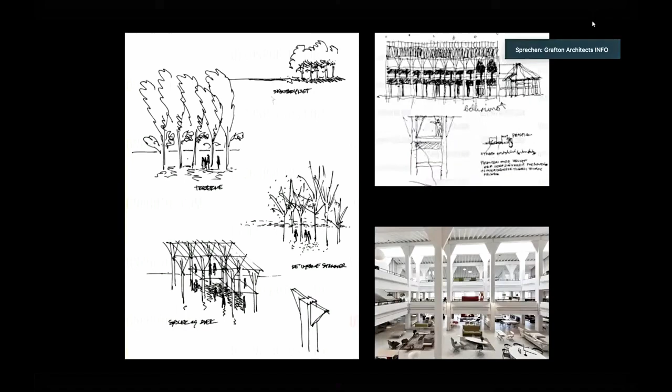But what really challenged us was how we could make something that feels like a warehouse—what Yvonne calls a warehouse of ideas—that it could feel very non-prescriptive and open, and that we provide light and volume and ventilation, and that within that students could inhabit it in whatever way they wished. Next image. One of the things we did was bring dance and library together instead of separating them out. We thought it would be fantastically stimulating to always make one aware of the other.

So we have the really quiet spaces in contact with the really noisy spaces, which are rehearsal studios and performance spaces. And we also made the central heart of the building into what we call a democratic space, a courtyard where events, lectures, teaching or celebrations can happen, and this feels like the heart of the building.

On the bottom image is the wish to give the building a civic presence, and we've planted this with vines so that it's usable by students. As Yvonne mentioned the COVID time, this building worked extremely well during COVID because the circulation is on the exterior. We did this for fire safety reasons, to escape to the edges, but also to make it a place of pleasure.

What's fantastic is you get dancers in what is sometimes a lecture space, sometimes a formal space. We've opened this space up to the foyer so it can be sealed and acoustically separate, or it can be where people wash in from the street and see what's happening, and be aware of the library spaces up above and vice versa, so there's a real vibrant heart to the project.

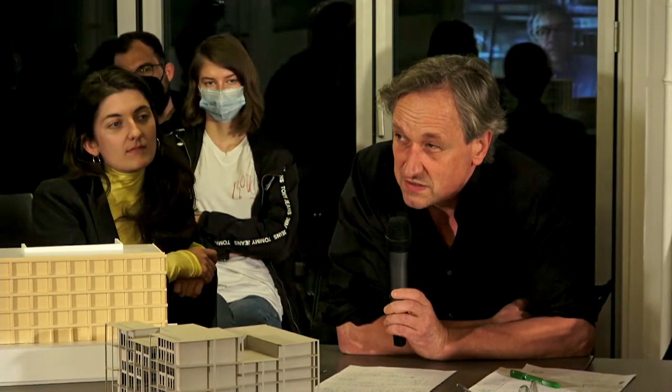Now for me, it was quite interesting to see your fantastic selection of projects. What I recognized was that I had the idea that all these projects made somehow a reference to landscape. You showed, in the beginning, the cliff, but also these canyon-like spaces, the external circulation, and I think the interiors you showed very often felt a bit like outside spaces. For me, these projects have a sort of surprising beauty that is rather non-classical—not in the Renaissance way of working. I was wondering if, in the design process, there's also an influence of your more direct surrounding—this experience of being Irish, living in the Irish, very beautiful landscape—does that also have an influence on the design process?

Thank you for your question about the reference to landscape. I think yes, we're lucky to be Irish. We are very aware that we live on an island out in the Atlantic. It's kind of crazy that Irish architects did a project in a city like Lima and won a competition, which we didn't realize was going to be a possibility. I think what is fantastic about the place we all come from is that we are very aware that we are human beings. I don't know whether it's cultural—our poets, writers, artists and music are very physical. But we like people as well. I don't think it's just that we live where there are green fields outside that go off into the sunset.